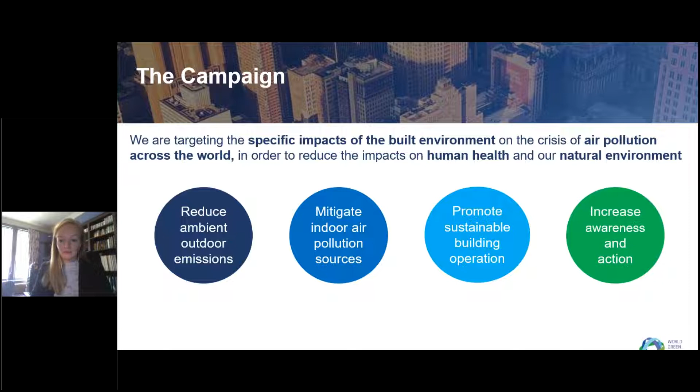So to illustrate a few of these specific sources, just to fully talk through this introduction, I mentioned ambient air pollution, this outdoor air pollution, and some other factors we must be aware of, but we want to be certain we're fully emphasising the role that the building and construction industry can have in causing this pollution. There's a range of different causes, ranging from energy. We know that 39% of global energy-related carbon emissions are attributed to buildings, both operationally and in their embodied emissions. Construction, we know that there are, unfortunately, pollutants being emitted at all stages of the supply chain, for example, from the creation of bricks through to the pollution being created on site.

And then, of course, we like to thermally control our buildings, don't we? We like them to be comfortable. Here in Scotland, we are focused very much on heating, but I assume that most of you in the UAE are talking more from the cooling perspective. But particularly in the developing world, we know that heating in old-fashioned cook stoves, where we have combustion happening within people's homes, is a huge cause of black carbon emissions. And cooling as well, where we have emissions of HFCs found in air conditioning systems, are another potent climate forcer.

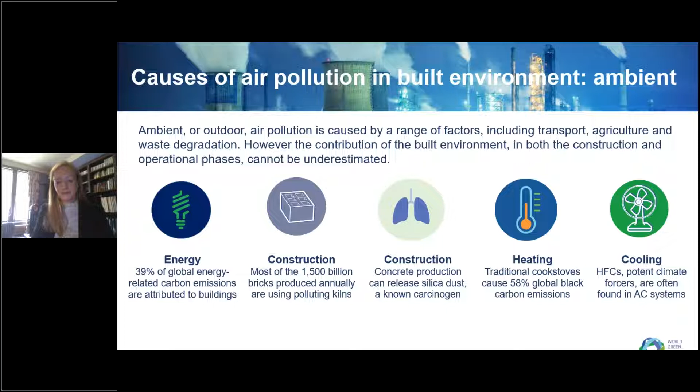And then on the other side of the coin, we have this indoor air pollution. Again, we have the heating. We know that when we're combusting these solid fuels within our houses, that's creating this indoor air pollution which can go between the indoor and outdoor environment. More specifically indoors, damp and mold can be caused by air infiltration or inefficient building fabric, and that can create airborne microbes, which are very damaging to our health, particularly if you're somebody who already suffers from respiratory problems.

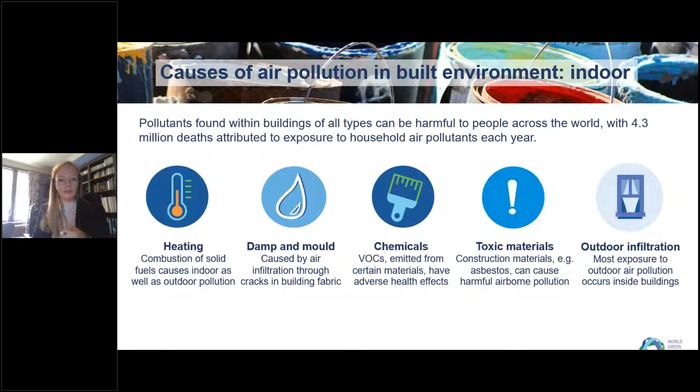Same with chemicals. I'm sure we'll talk more about VOCs, volatile organic compounds, that can be emitted or off-gassed from certain materials that many of us have in our homes, schools, offices. Same with toxic materials that we're growing an awareness of, but they still remain exposed and in the active material cycle. And then interestingly, outdoor infiltration into our homes or buildings is a really interesting topic of conversation. Studies have shown that actually most of our exposure to outdoor pollutants occurs when we're inside. So there really isn't this clear-cut divide between outdoor and indoor. We do sometimes have to look at them a bit more holistically.

Now, I touched on these problems, but I want to really emphasize that when we're talking about the impacts of air pollution, we want to look at it from 3 different lenses. In terms of people, air pollution is the largest environmental killer in the world, so the death toll is larger than from unclean water. That is something that, as we increase awareness of, we do have the power to hopefully try and reduce.

In terms of planet, we know the emissions related to these pollutants have a huge impact on the enhanced greenhouse effect. That's something that, again, we want to cut down for health and for environmental reasons. And in terms of our buildings, we will look at construction, operation, and the life cycle. There are ways that we can create, construct, deconstruct and operate our buildings that will be healthier for people and cut down on those planetary emissions too.

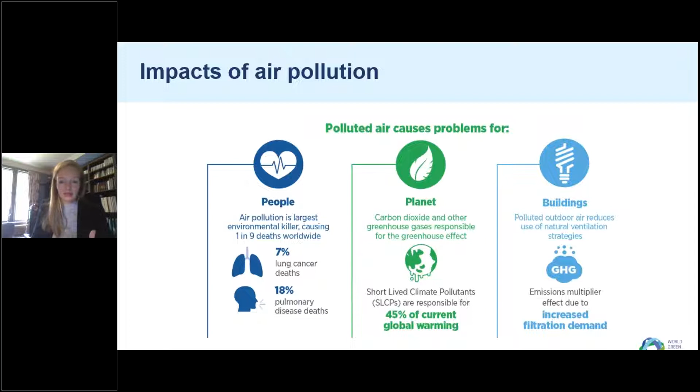So in the last couple of minutes of my introduction, I'd like to share with you what we're doing on the call to action side. Lindsay did mention this briefly in her introduction, so thank you.

You may have heard of it already, but the background is that we recognize with air quality that the biggest challenge really is that it's partially invisible. Particularly when we're looking inside buildings, generally we are not aware of the levels of pollutants, particularly these chemical pollutants that are inside our buildings, offices or schools. And if we cannot measure it, then it's very difficult to improve it.

So one of the realizations we've had is that if we're going to tackle the contribution of the built environment, we have to be able to measure it, and we need data to be empowering those decisions that we want people to be making in their personal lives, in their organizations, and to transform government policy eventually.

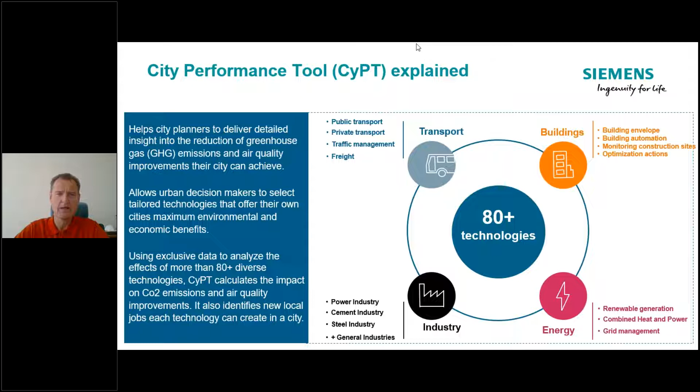So in the city performance tool, for example, everyone, and also the Emirates, have targets, and that's nice, but are we just in the hand of fate? Are we just looking at our 24-hour past averages and saying it was a really good year last year, or it was a good day yesterday? We actually are able to define the future by the right action.

One action, of course, is all of us could drive e-cars or hydrogen cars. But the important part is that we better manage and monitor the KPIs, which measures are possible. Is it possible to switch from fossil fuel to solar at a certain wind direction? Yes, it is possible. Is it currently protocol? No, it is not protocol.

Do we, on the street between Sheikh Zayed Road and E11 between Abu Dhabi and Dubai, look at wind direction and congestion and influence the toll system? No, we don't. But these are all levers and measures that we have in our hand to control the inflow of pollutants into the city. We are not only in the hand of fate.

We can roll out a future smart city by having more data, analyzing the data, and better understanding what can cause citywide pollution. It's not just happening. I believe construction work, wind direction - all these factors need to be considered in deciding if work has to continue or be shifted to tomorrow, or if generation has to be migrated to a different source because the wind and NO2 pollution for the city is wrong due to wind direction. These are all actions that currently we might know a bit about, but we're not acting on it because we don't have a city performance tool and enough data to allow us actionable insights.

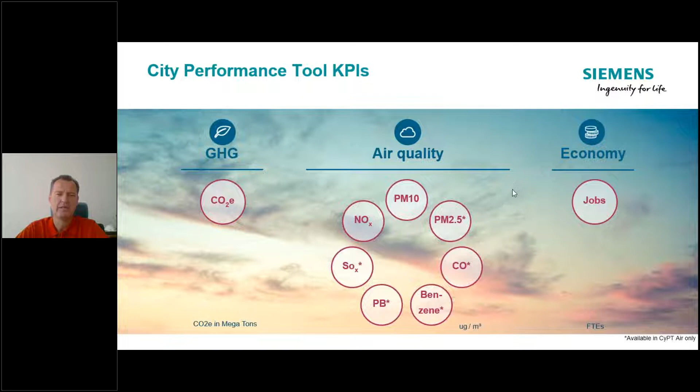Who is looking after the dump truck that just dusted a whole suburb because the wind direction was into that suburb where you and me live? We do not investigate. We do not even report. We don't have a correlation between action and reaction. So that's what we try to mitigate through a city performance platform, a tool, which is also accredited by several institutes. It's the right direction to go.

That's why we want a few projects - I'll show you here around the world, some completed, some initiated, but it's far too few. And we also need to bring that to the Middle East.

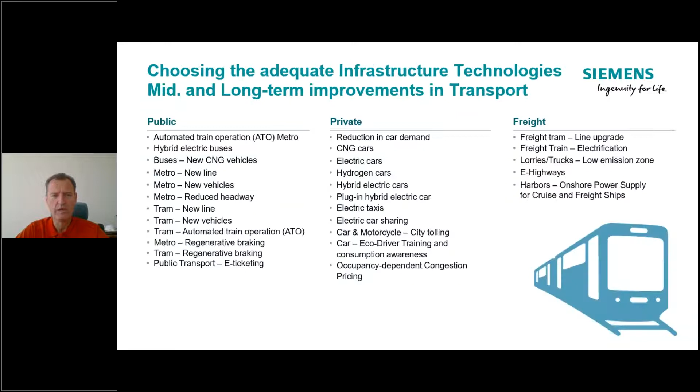I know we have databases and historic data, but where we want to come to is to more or less predict the future. So here you see, you can go through the slides in detail - I have only 10 to 15 minutes maximum, sorry - which transportation, for example, is less impactful on CO2, and what is the cost versus benefit.

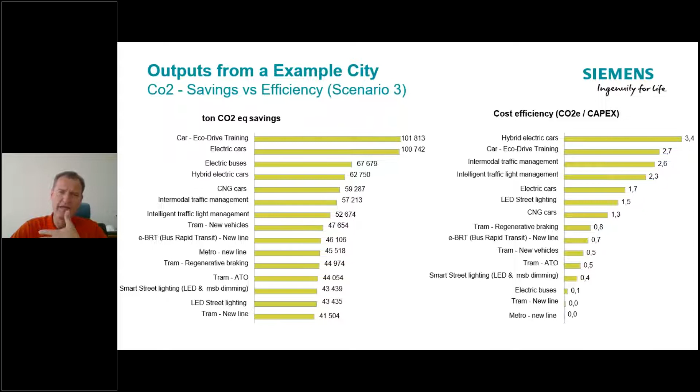On city air management, we need to enlighten companies and citizens. And I emphasize companies again, because it's not only us who are in the wrong vehicle, who are not using the tram and the metro. It's also the decisions of companies - which trucks they use, what fuel they are using. Do they use hydrogen? Do they use electric trucks? What are the options they have? Because most of the traffic is not in our hands.

So we need to create more of a campaign, and we need to reduce the dangerous air days. And that's again not fate - these are smart decisions. So when we see correlation between weather, pressure, wind, and generation options, we can also switch to different primary power sources. That will reduce the bad air days in a managed way, and not by fate.

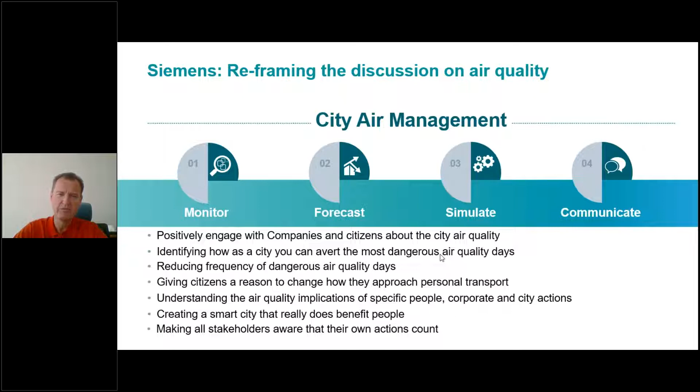So us as individuals, we have the choice of our own transportation. And we need to socialize to all stakeholders - that's government, companies, and individuals - that their own action counts. Once we use artificial intelligence on top of historic data, forecasting data, and certain simulations, we will be pretty accurate in forecasting.

Let me jump over that slide - in forecasting what's going to happen, and this is where I wanted to get to. It's not only in retrospect and post-mortem, where we look back at the last 24 hours and are either proud or upset about the KPIs we've published. We need to come to a model where technology really helps us predict the future and forecast air quality over the next 5 days or more. That only works by integrating multiple sources of data into neural networks. I believe the technology is available. What is not available is the data and the cause-and-effect reporting.

The thing is not only that we report crimes, we have to report certain events that we see. Citizens and stakeholders need to be rewarded for avoiding events that can feed a neural network and sharpen our predictive models. It's not only that the data will tell us everything, we also need to correlate it to observations.

So it will still require a completely different data supply, because it is the perception of people that needs to also feed into the artificial neural network. Only sensors don't do the trick. We need to correlate and come to a very accurate forecasting model. And that's not only the purpose, the mitigation model is the purpose.

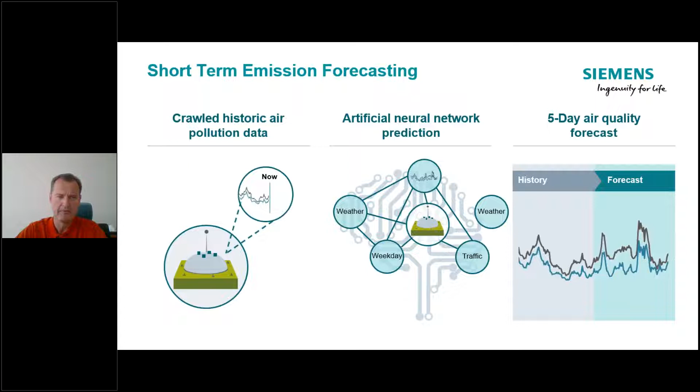I think we go over that. These are all countermeasures you have heard and seen many times. For example, in the City Air Management that is online in Nuremberg, lots and loads of sensors are there, but here there is one little yellow shading, and it has a NO2 alarm, and there are a few still green shaded, but again exceeding some NO2 or down PM10 and PM2.5 thresholds.

If we would have that around the suburbs or where we live, be it in Abu Dhabi, in Dubai, in Fujairah, or in Ras Al Khaimah out there, that will then allow us to map observations to it and have an accurate cause and effect analysis.

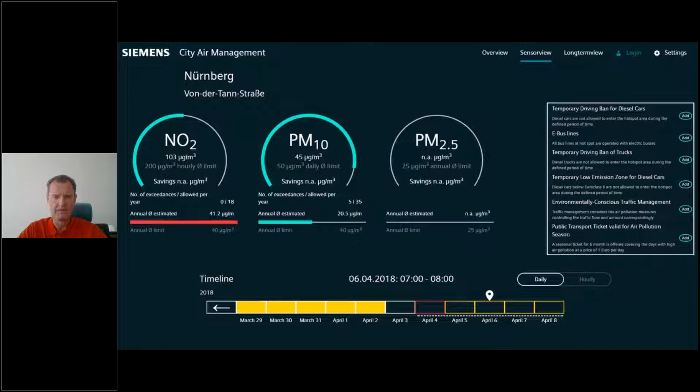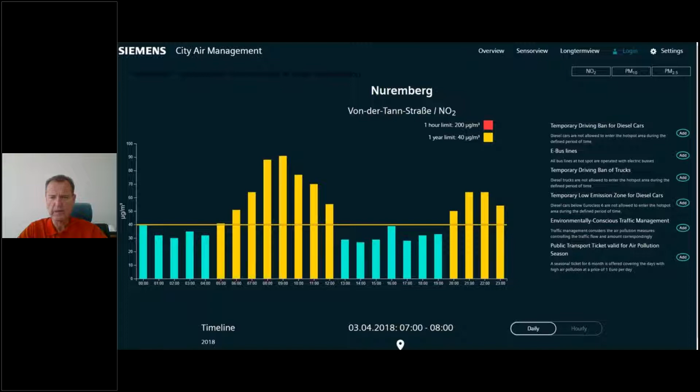And these platforms exist. I highly encourage that maybe Smart Dubai will roll this further out. The target is not to predict or to report the past. The target is to influence the future of pollution and run through models that allow us to manage it. So by dashboards, by displaying, and by having grip on actions, we will be able to shape the air quality outdoors.

Now coming to indoor solutions, we are in a time of a viral attack of unseen proportions, and there are attempts not to reduce the outside air in building HVAC systems, but only run on outside air, which could also have a detrimental effect. So I'm not the apostle of that. We have also to reduce the VOCs in the buildings, but then it comes to bacteria, pathogens, viruses, and of course also mold. And simple air change doesn't do the trick anymore.

We need to have active components, and the solution that I am proposing is an ionization technology that basically, if we have fine dust, pulls up the dust through positive and negative ions. So we make the particles larger, easier to capture, falling down in the ducts or in filters, or it will also disable pathogens, viruses and bacteria over time.

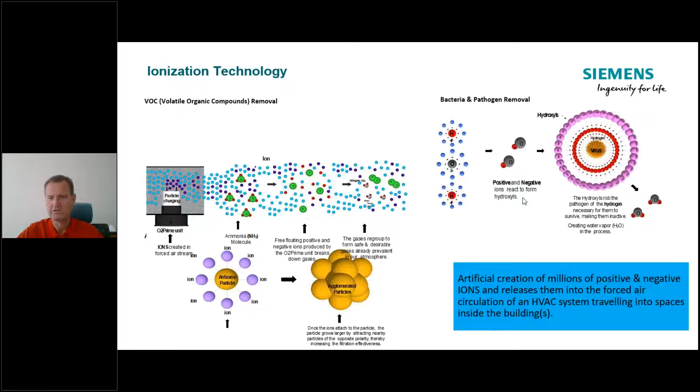Details on the technology can be provided. The important thing is all of us will earlier or later go back to offices, and we have an awkward feeling. Such a solution can be retrofitted into existing HVAC systems.

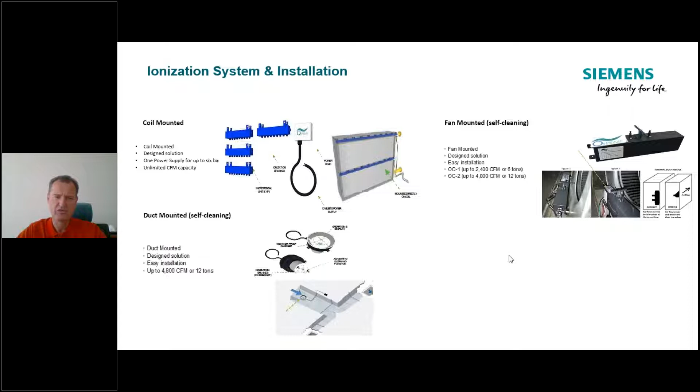You can either have it mounted on coils, you can have it mounted on ducts. Inside the ducts it can be inserted, or it can be fan mounted, with very low energy consumption and very easy to install. Results show that this is really an effective countermeasure to the worries and feelings that we all have. Also, units that are portable.

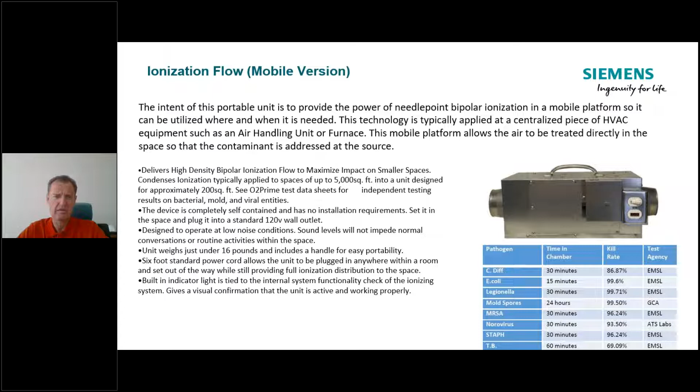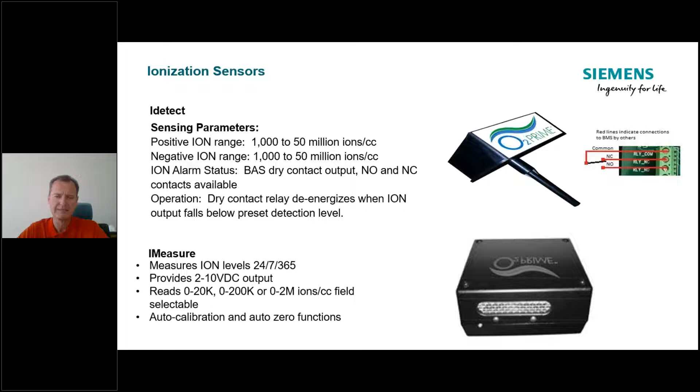This has nothing to do with Siemens, I'm showing you other technologies too. We have the sensors, we have the measuring devices, but currently, as we speak, in our buildings this is not integrated. I am proposing this technology based on this matrix, because, for example, a purely an air filter doesn't help us kill the pathogens. It cannot be installed as easily as the technology I mentioned before. It has many gaps. And ultraviolet rays also have lots of gaps. Ionization, in my opinion, is very quick to deploy, and it will integrate into the building management system.

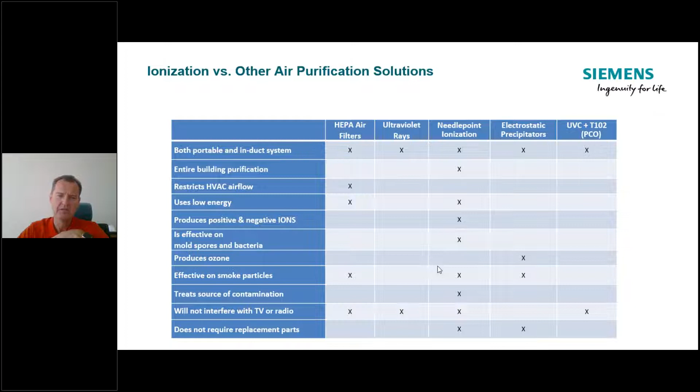We have a very good grip with the occupants of the buildings, the office workers, us, on our office booking platforms. For example, we use Comfy, where we book our desks and announce that we are going to the office, and where we monitor that the governmental thresholds of less than 25 to 30% of occupants are maintained in the building. Such an app on your phone can also update you about the performance of the air purification system in your building. And that will give the returning office workers a real good feeling, and of course it will also influence their performance and productivity.

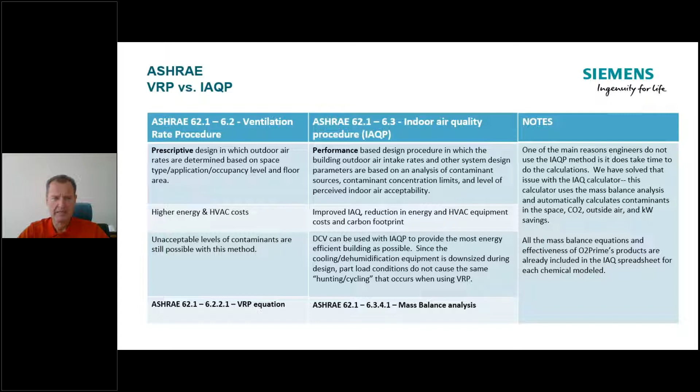Later, when you look through the slides, you can see how these measures comply with ASHRAE standards. And I think I'm almost through.

One case study I like to mention - and I'm sure you've seen similar cases - is a daycare center that was complaining about sicknesses and coughs rotating from child to child. Once a purification system was integrated into the HVAC system, the infestation and spread of sicknesses reduced drastically. A final post-installation test, verified by an independent authority, confirmed that readings of pathogens and other VOCs had reached a negligible level.

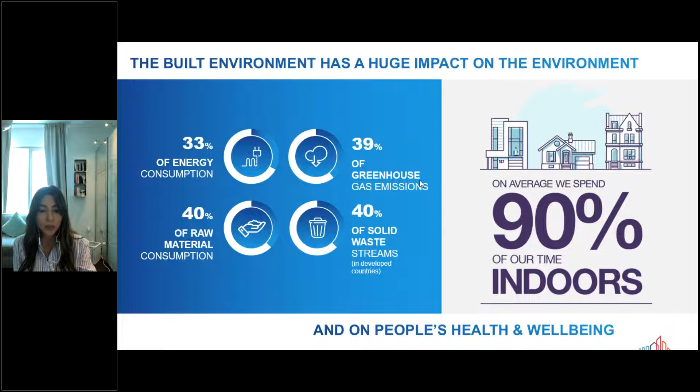A quick introduction about Saint-Gobain: we have been in the construction business for more than 350 years. The key to our growth is an innovative approach and a sustainable mindset. Our main objective is to help the construction industry and key stakeholders create healthy and comfortable indoor environments by designing and manufacturing the right building solutions.

This is the definition of the multi-comfort design approach, which starts from the end user's perspective. Depending on the function and location of the building, and with the help of our building science team, we've created a set of criteria to satisfy the four sensorial comforts: the feel, the see, the breathe, and the hear - while also fulfilling low energy demand, low carbon footprint, life cycle assessment, and other requirements and regulations that our solutions impact both directly and indirectly.

Following this approach, we've gotten involved in different projects all around the world. The idea is to have ordinary buildings reach optimum comfort and performance levels in a sustainable and cost-efficient way. You can find all of our 30 projects on our website, multicomfort.com.

Our focus today will be one of the most important key parameters: indoor air quality. We cannot live without air, but it's also the most difficult parameter to feel and assess without measurements. It's very easy to say it's loud or hot in here, but it's difficult to say a place has bad indoor air quality unless it's really smelly and stuffy.

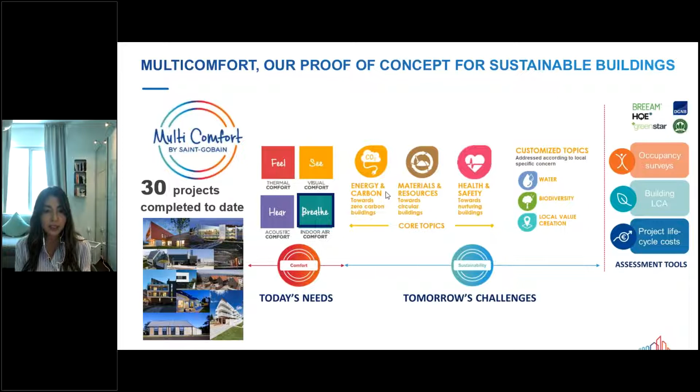In terms of outdoor pollutants - and I think Katrina and Marcus have covered most of them - some sources are naturally occurring, such as particulate matter, while others are produced by the transportation sector, construction sites, energy generation, and in the UAE in particular.

We can see that particulate matter concentration due to sandstorms and dust is very high, and we also have higher levels of ozone due to the construction pace in the region and the continuous use of cooling systems - HVAC - everywhere.

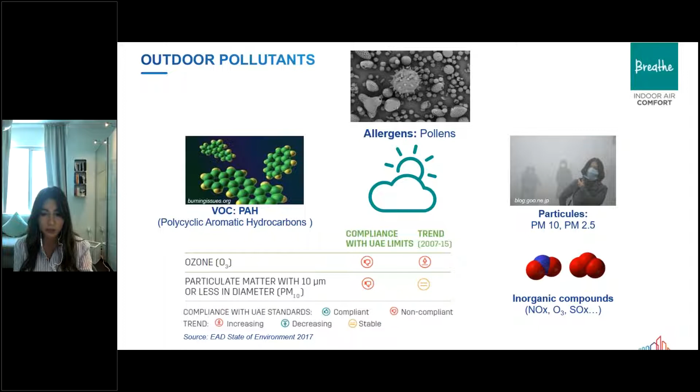So in terms of indoor pollutants, we can have different nature and origin. We have three main different types: particulates, which could be dust, dander coming from animals, and pollen.

We have also microbials, so living organisms, bacteria, viruses, and mold. And we have gases, so mainly the chemical pollutants known as VOCs, they are emitted from the building itself, the construction material used, the furniture, the cleaning, and the cooking emissions.

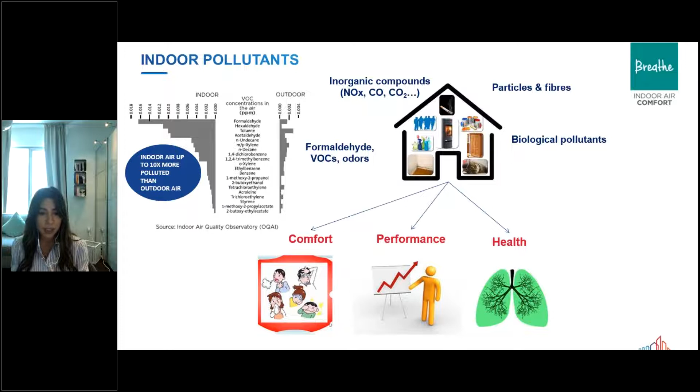Unlike we might think, indoor pollution is much higher than outdoor pollution because of two main factors: the exposure time and the concentration level of some of the pollutants, such as VOCs. These pollutants are known to have a short-term comfort effect, an impact on performance and productivity, and also a long-term health effect that we call sick building syndrome. And of course, you all know the symptoms related to that.

We need a well-designed and operational HVAC system with, of course, a maintenance protocol on air tightness and filter efficiency. And also air cleaning, which Marcus also discussed - filtering the air is very important, using air cleaning technology, active building elements capturing VOC from the environment, and very simple measures like air purifying plants, for example.

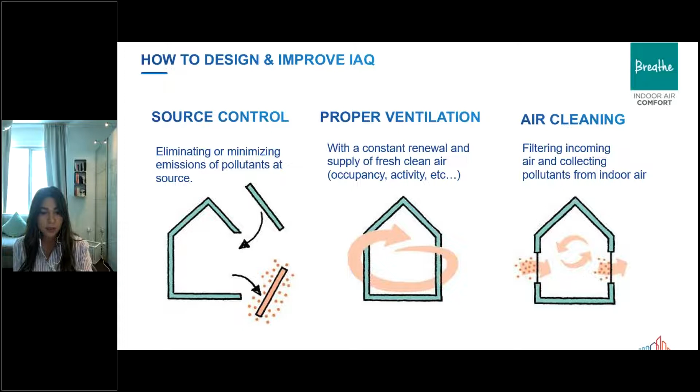So how to choose the right products? With today's rising awareness, people are starting to have the right choices in terms of product selection, whether at the stage of building design or also when doing renovation work. So local regulations, product certification, and labeling schemes are very important and helpful to filter the right construction materials. In Saint-Gobain, we have a wide range of low-emitting VOC products.

You can see here, for example, formaldehyde-free insulation material, which is certified GREENGUARD. You have also gypsum board with Activ'Air technology, helping to capture up to 70% of the formaldehyde in the room, certified Indoor Air Comfort Gold. And also other building materials such as adhesives and coatings, complying with Dubai municipality low emitting product conformity.

So we have the right tools and testing in the market. We just have to create awareness so that people make an informed decision on what to choose, and have more stringent control also on site to verify that the specified materials are the ones used at the construction stage.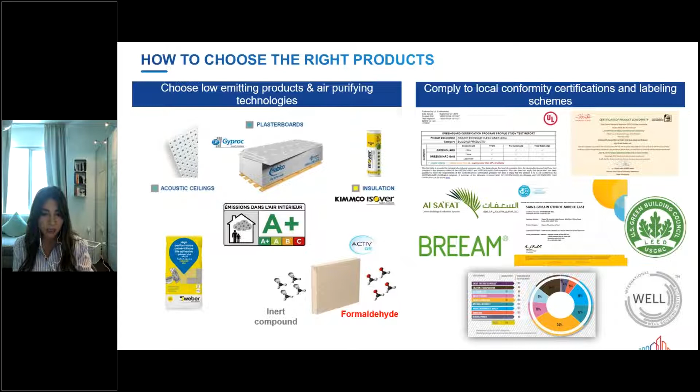So how to measure indoor air quality? This is very important - we have developed wide expertise in Saint-Gobain around the measurement of indoor air quality. We have a laboratory mainly used to evaluate and monitor our products and latest innovation. For example, we have emission and depollution tests.

It could be done at the sample product level, but also at a full wall level. We can also measure the impact on indoor air quality at the level of a large-scale chamber. We have also been involved in many projects worldwide with measurement on site. In this case, air sampling cartridges are collected and then analyzed in the lab.

There are two types of measurement that can be done when it comes to pollutants. We have the standardized approach, using air sampling cartridges removed from the air and then analyzed in the lab. This method allows us to identify and quantify the pollutants that exist in the air. It's a very reliable approach, but it's expensive and requires a certain level of expertise.

The other approach we can call continuous measurement, where we can measure total VOC (TVOC), CO2, temperature, relative humidity - these are usually measured, but also sometimes carbon monoxide or PM. So it can be an indicator of the trend, but does not give accurate values, and for the total VOC, we cannot identify the exact pollutant and their individual concentration in the air.

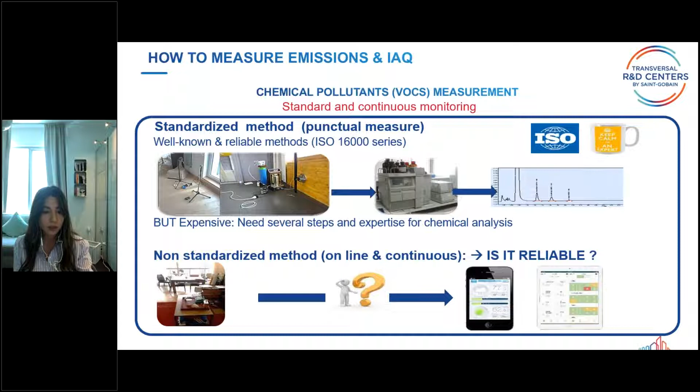So have a continuous monitoring with also some air sampling done in parallel.

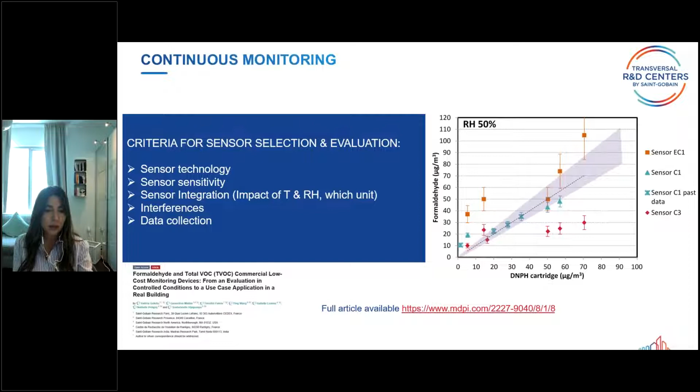Moving on to the second part of the presentation, Saint-Gobain has been very active working alongside World Green Building Council. As Katrina mentioned, we are a global sponsor for the Better Places for People campaign, and we've also been part of the Plant a Sensor campaign, giving expertise on sensoring and monitoring tools.

One of the World Green Building Council's focus areas is green schools. You can check on their website interesting data showing the impact of the indoor environment on the health, well-being, and learning of students. It's not only indoor air quality, but also acoustics, daylighting, and thermal comfort are evaluated.

This initiative has been adopted locally by EGBC, the Emirates Green Building Council, and we decided to partner with them on this project called the Emirates Coalition for Green Schools.

It started with a roundtable last year and the publication of a white paper that you can access on the EGBC website. The objective of this initiative is to bring together the UAE's strongest advocates for green schools, create a national platform for the expansion of green schools, and ensure that every child is learning in a comfortable and healthy environment.

Another important question we want to answer through the study is the current indoor air quality issue we have in UAE schools. What is the relationship between indoor air quality, building design, and the impact on health, comfort, and productivity? Also, what are the local policies and how can we explore efficient ways for control and maintenance? And what can we do to raise maximum public awareness and knowledge on this topic?

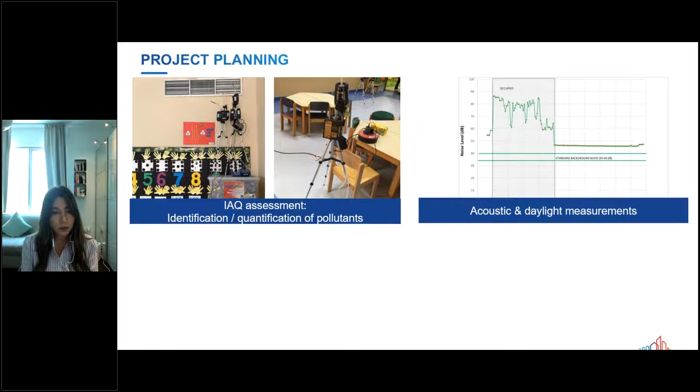So in terms of project planning, we are currently analyzing the data for indoor air quality assessment. The objective is to identify and quantify the pollutants. We've also done light and acoustic measurements because they're very important and impact comfort in the room. So the results of the study will be published in an industry paper available to the public.

And shared with the UAE schools and government stakeholders. It will be shared during the launch event this year. We will keep everyone posted on the date. And we cannot wait to share with everybody the interesting conclusions we were able to collect.

One of the key actions we are looking forward to is raising awareness and creating knowledge around the topic, whether it's the importance of indoor air quality, involving and engaging key stakeholders in the educational sector, or how to improve indoor air quality. So what are the basic measures we need to do, or in some cases do basic or deep retrofitting to improve indoor environments.

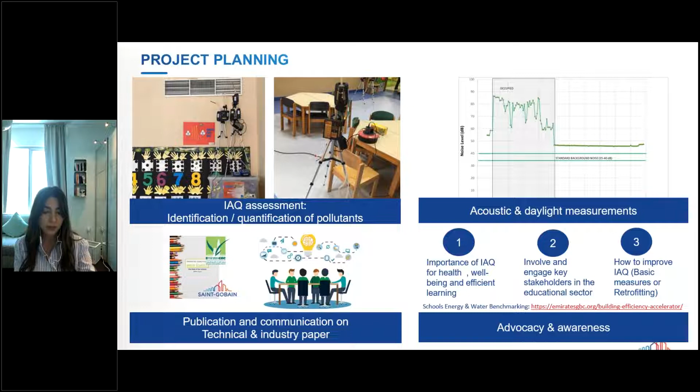So to conclude, I think after this crisis we are all more aware of the importance of health and well-being, and it's something we need to focus on collectively to build prosperous and sustainable cities. Thank you.